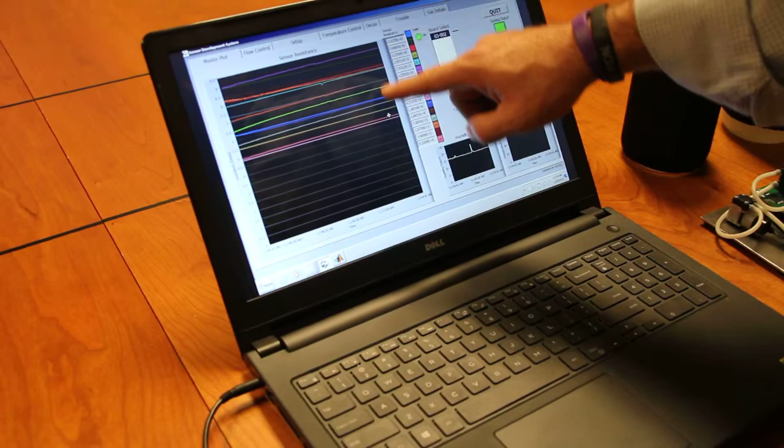We have the smart sensor sitting here on the sensor module, and what we've got here is a LabVIEW interface that'll show you the raw signal responses from our nanosensor array. And right here you see there are 16 nanosensors with 16 signals. We've got a temperature and a humidity sensor that are on board to the chip.

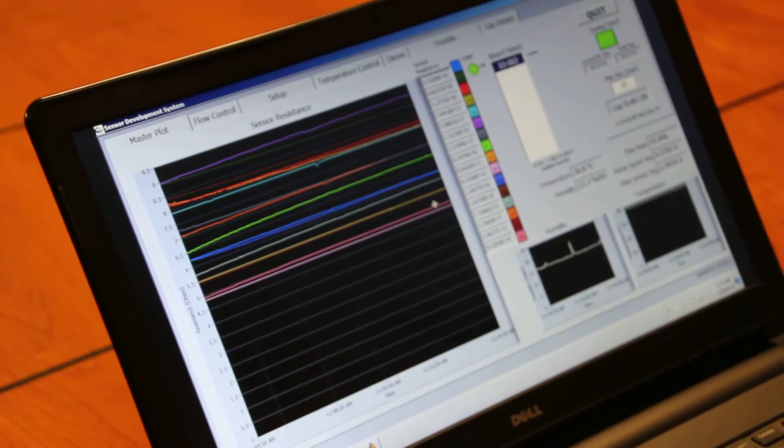So what I'm going to show here is a demonstration of the smart sensor system detecting toxic industrial chemicals and showing the strength of this approach, where we have negation sensors that will help proactively look for and negate possible interferent conditions such as relative humidity.

And every technology has its own vulnerabilities, and we'll show you how we've addressed it in ours. And in reality, other technologies either haven't addressed it or they couldn't address it because the interferent masks their signal's ability to pick up the actual threat gas.

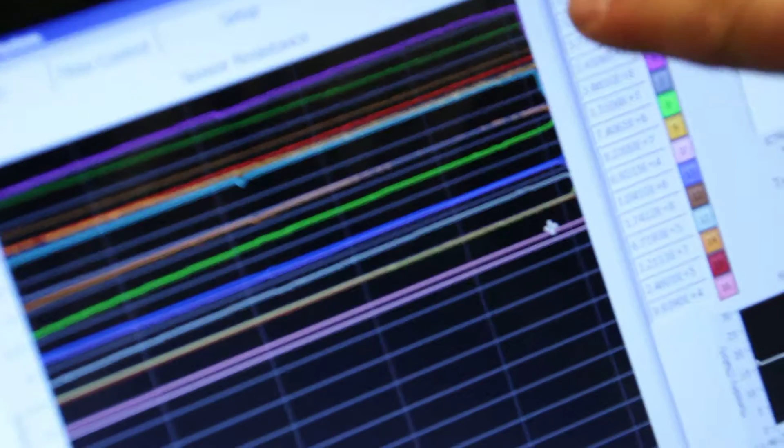So what I have here is ammonia gas. I'm simply going to open up the supply, put the sampling tube into it. You're going to immediately see responses from the nanosensor arrays. These are instantaneous responses. These sensors all feed into a suite of algorithms.

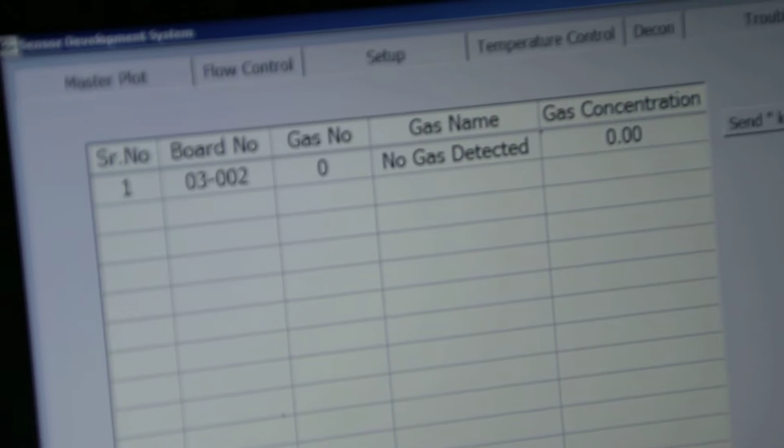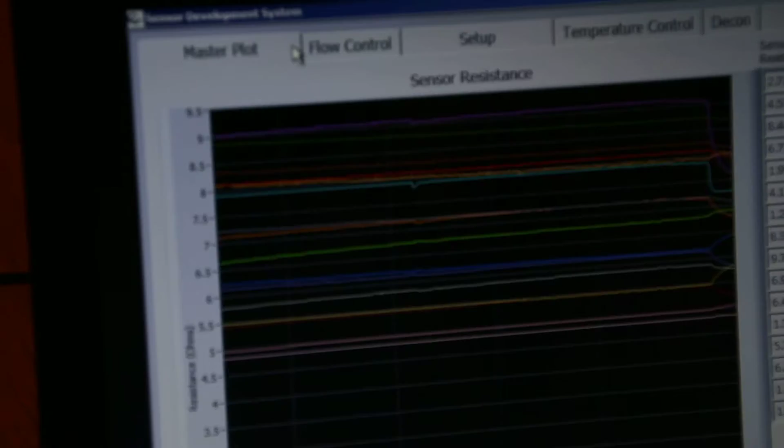And if we go to the output of the algorithm, before we did the hit, there is no gas detected. It takes up to at least 12 seconds to identify what gas. We detect ammonia at 3.5 parts per million. If I go back to the raw signal, you can see that they are actually responding.

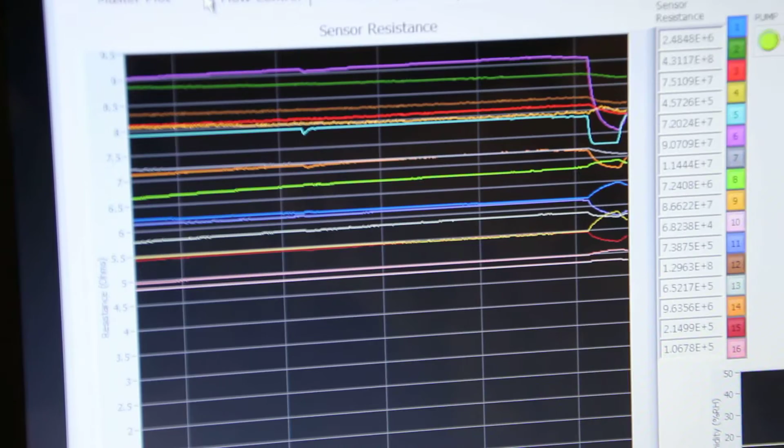I will disconnect. So I'm now removing the ammonia, and you will see that the raw sensors will immediately recover. It's a reversible behavior, and these sensors will last for multiple years, typically 4 to 6 years.

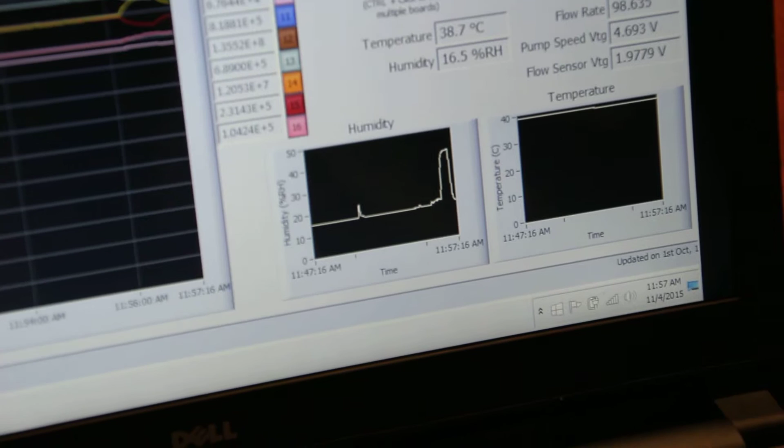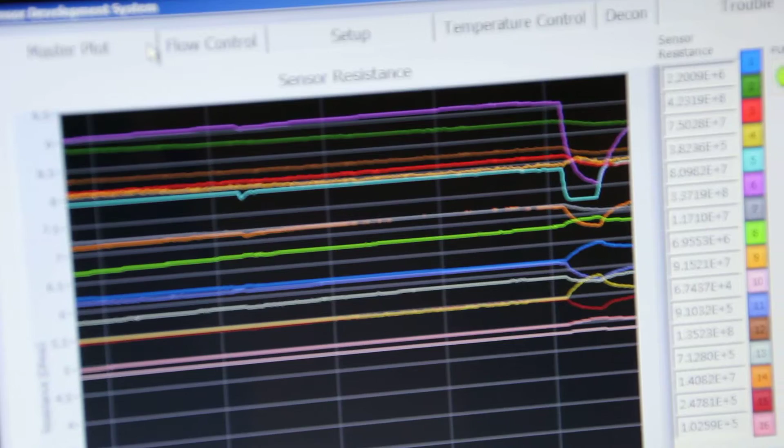If we look at the humidity sensor, we actually can see that while we were exposing it to 3.5 parts per million of ammonia, we were actually also experiencing a simultaneous change in relative humidity of over 25,000 parts per million, or about 25% RH. This is simultaneous, and we were still able to detect the actual trace level threat in that simultaneous RH change.

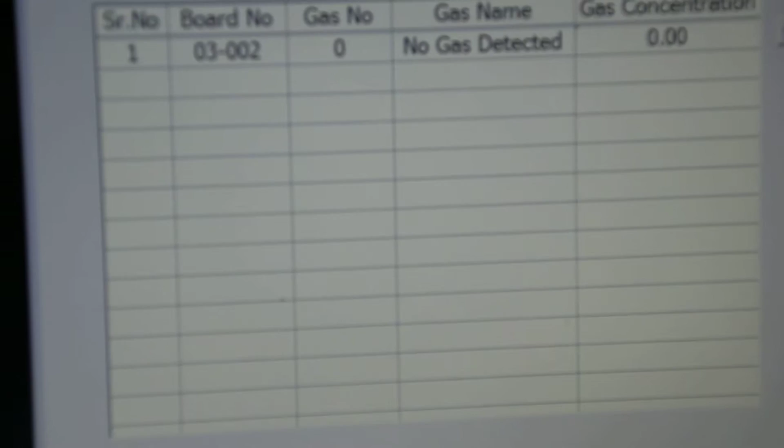This is significant. Most technologies cannot do this. Even if they had an onboard temperature humidity sensor, the RH change would have masked their signal response to the threat. So if I go back to the gas details, we have recovered. So now the device says there's no more threat, and it is ready to test another condition.

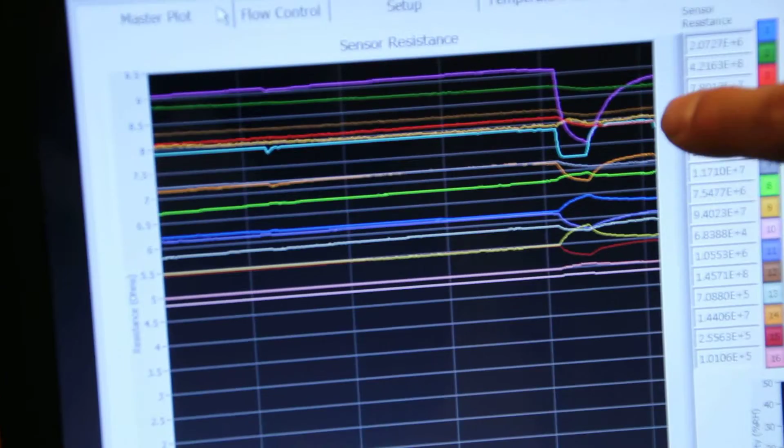If we take RH, so this is simply water in a bottle, and we disconnect and sample through our sensor array, we'll see some instantaneous responses to the moisture change. We'll see that also as evidenced on the humidity sensor.

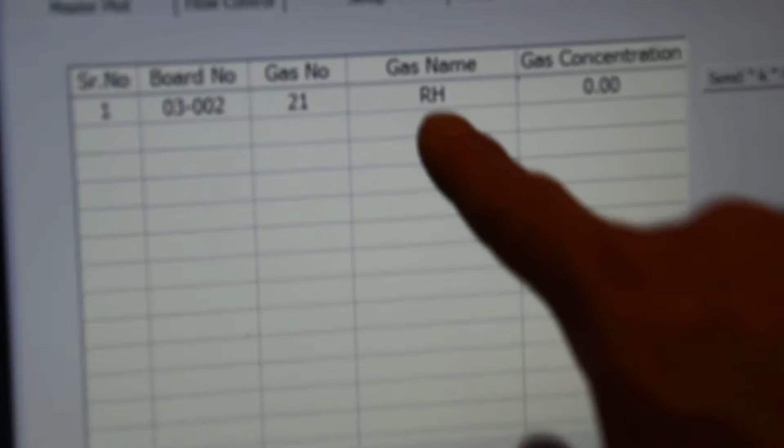But the key here with the negation sensors is we could say, okay, we don't detect the threat, but our technology's uniqueness is we will proactively identify non-threat conditions, as in this case relative humidity, to tell the algorithm we've identified something, it's not a threat, so we've negated that possible false alarm.

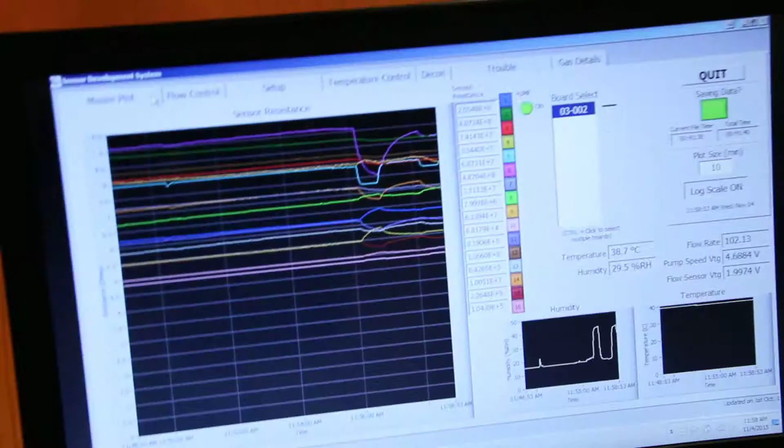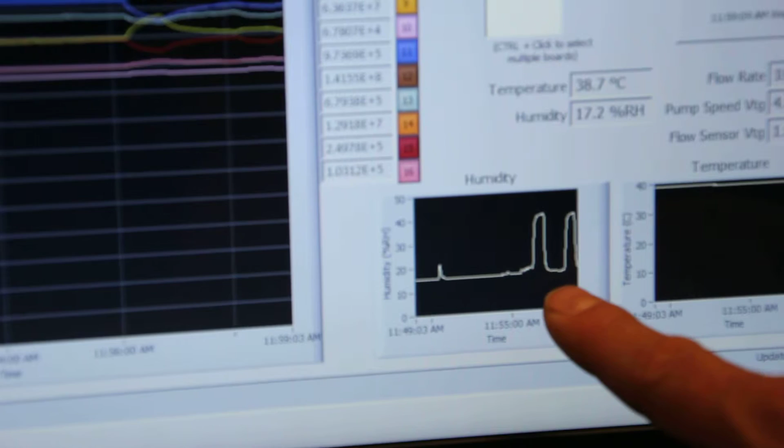I disconnect, and at this stage you can see that the nanosensor array is in full recovery mode, the humidity sensor is in full recovery mode, and what's critical about the humidity sensor's responses to both the ammonia plus RH change and then the RH change only is they're actually identical from an RH sensor standpoint.

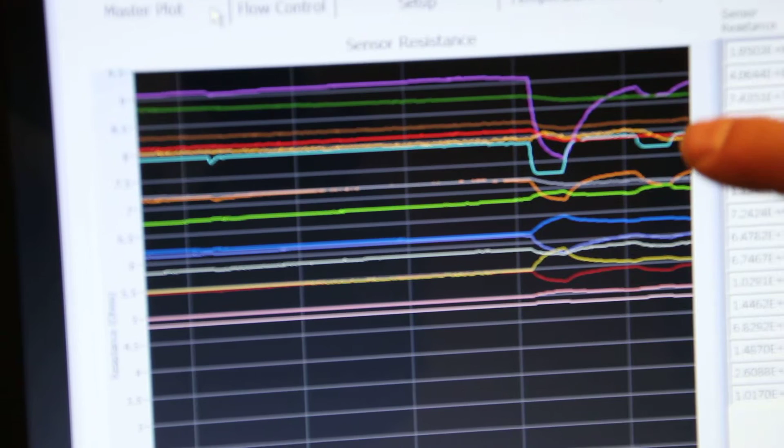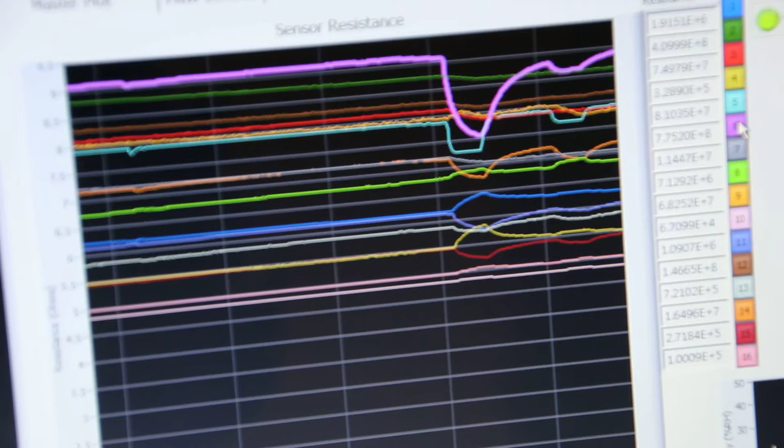But the nanosensors are absolutely not identical. You have some sensors that will respond to the ammonia, but they don't respond to RH. That would be evidenced by, for example, sensor 1. And then also if you look here at sensor 4. And then if you even look at sensor 6, the ammonia response was quite large. The RH response only was quite small.

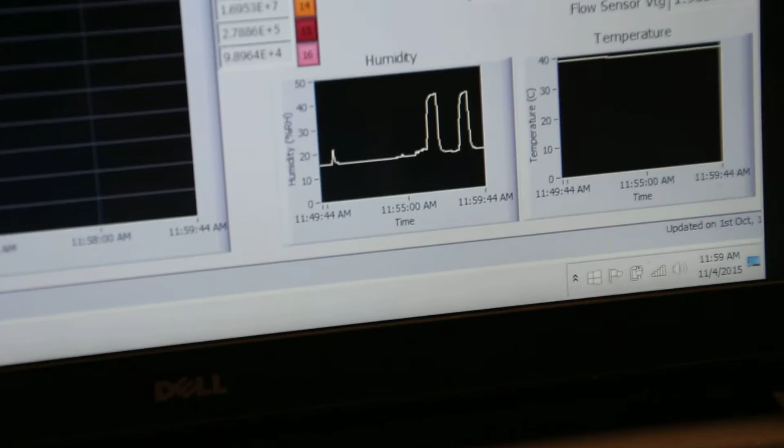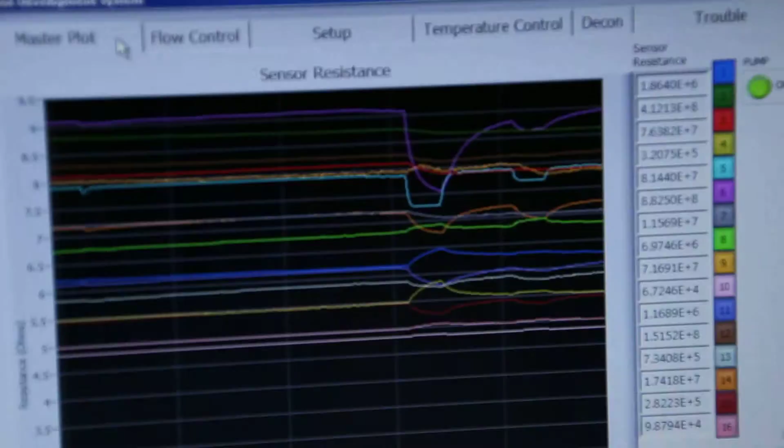And again, the ammonia response was to about 3.5 parts per million. The RH change was about 25,000 parts per million. So now if I go back to the algorithm output, we're back to no gas detected. If I go back to the raw signal data, you'll be able to watch. I'll expose this to chlorine gas. Again, I'll take the sample inlet, connect it to our chlorine source.

If we look, we get immediate nanosensor array responses, and these are growing. So these rates of responses are what information is fed into the algorithms. Again, we see an immediate RH change simultaneous to that. It's a very difficult condition. And we go to the algorithm and we detect chlorine within seconds.

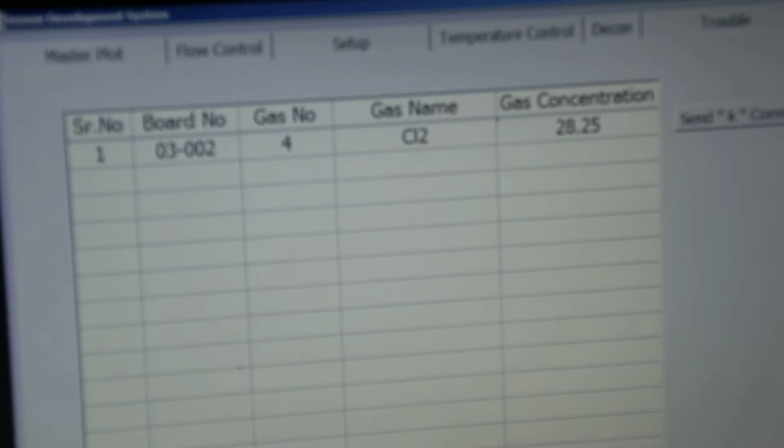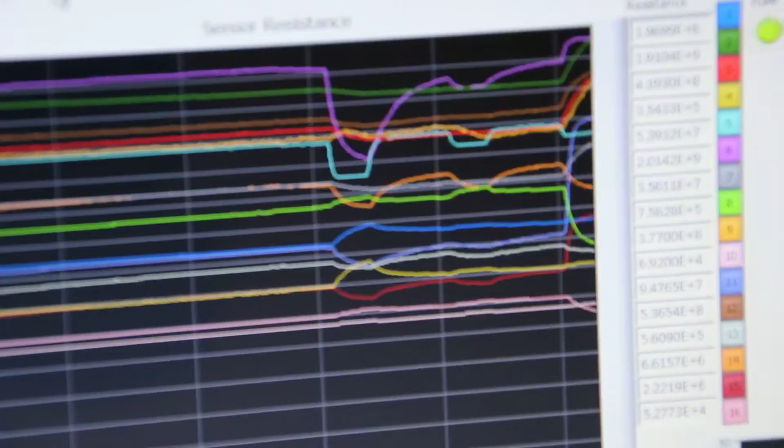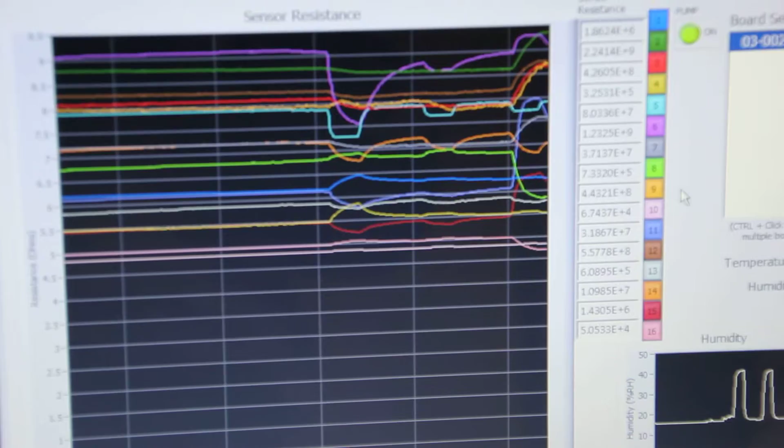And if we go back to the chlorine responses, they're still responding. If I remove them, they will start to recover. So I have now disconnected. This is the sample inlet. We are now in recovery mode. And as evidenced, if you look at sensor 5, it's immediately recovering. And if you look at the RH responses for all three conditions, they look identical.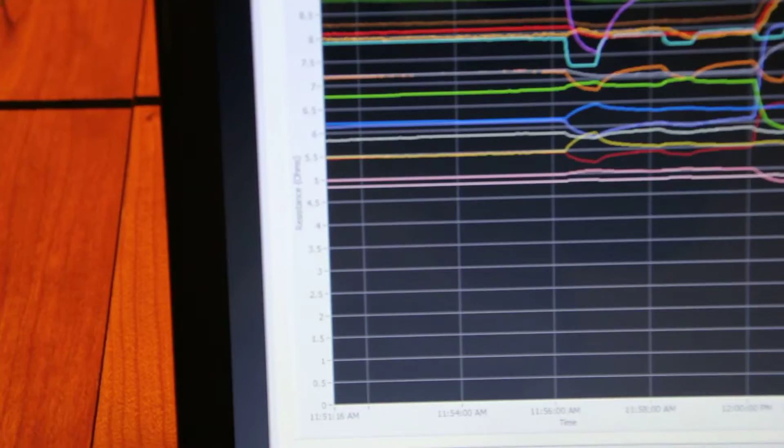And the essence of this is the smart sensor can detect chemical threats at trace levels, not only in the background of interference, but in simultaneous changing backgrounds with interference. And RH is a universal interferent to all technologies. And if we go back to the gas details, we are back to no gas detected. This is fully autonomous. It's continuous, real time.

Just to look, we sample gas in, it comes through our sensor, through a pressure or a flow sensor, through our pump, and exhausts out this way. This is a fully autonomous system with no user intervention required, and we simply have an on-off power switch, and there is no calibration required for detection or identification, and only periodic calibration is suggested depending on the level of quantitative accuracy that's required by the user.

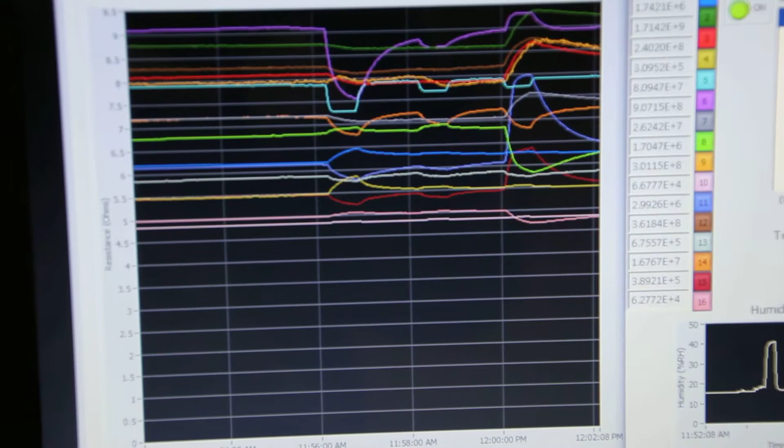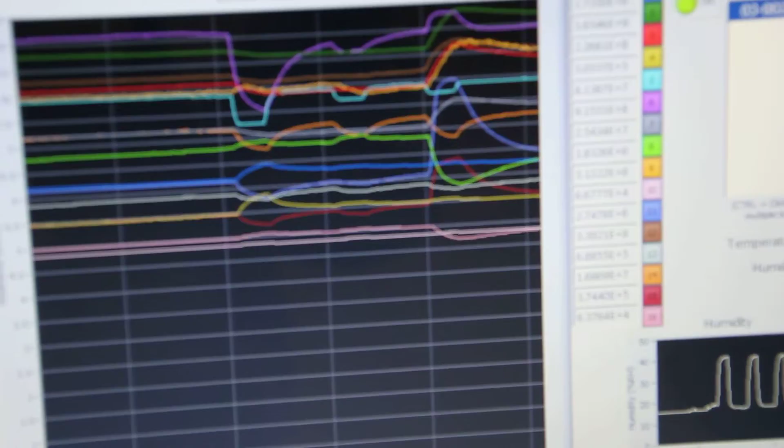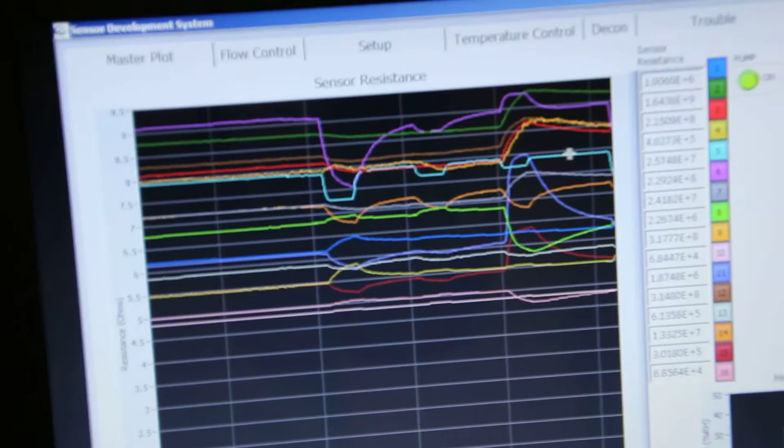And so now you can see we go to our algorithms. We are good to go here. I will just show you again ammonia. If we expose the device, the smart sensor, back to ammonia, we are now sampling ammonia. We see instantaneous responses again. We also see instantaneous humidity response with the humidity sensor.

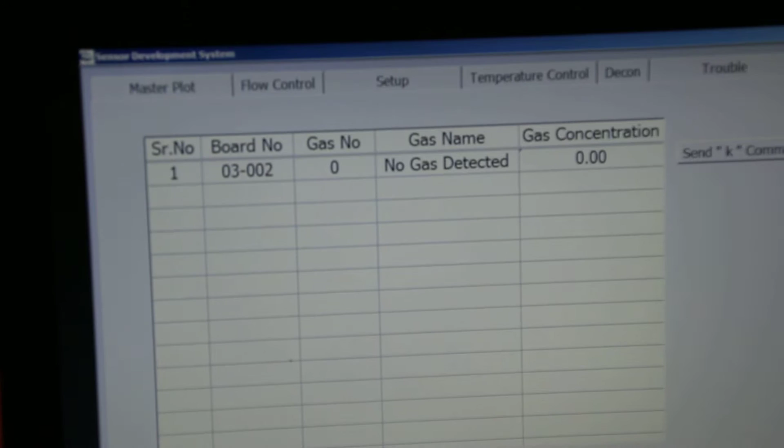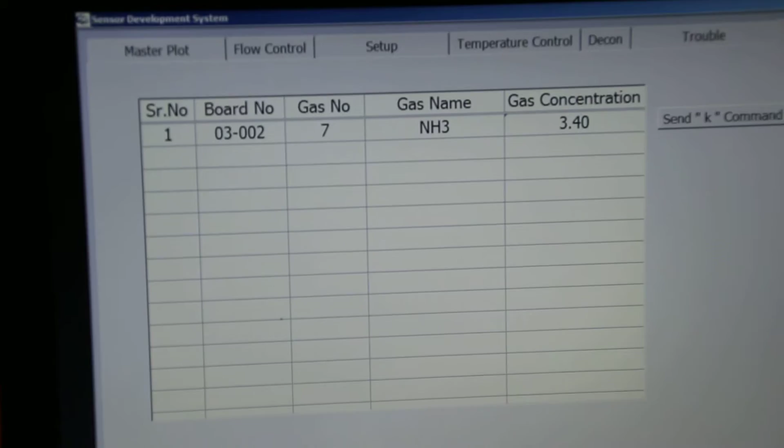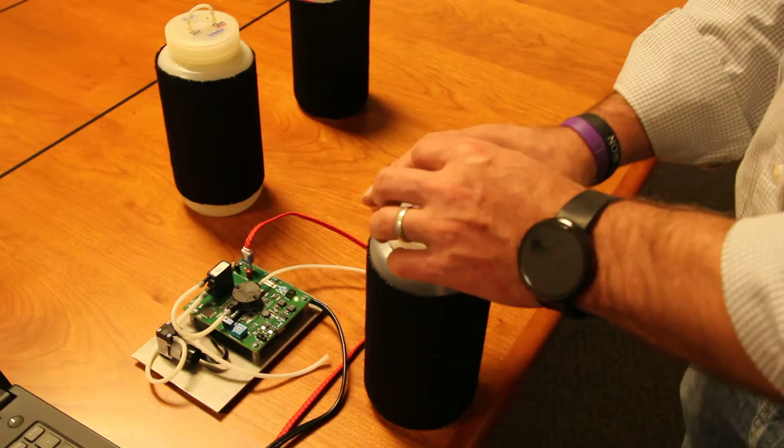And if we go to the algorithm and we await the assessment, the algorithm is taking in this raw data and tells us that we in fact have ammonia. It's important to note that the concentration is slightly less this time, and that actually makes sense because this bottle builds up headspace to build up concentration, and we had just sampled from it before, so it was building back up that headspace. We disconnect.

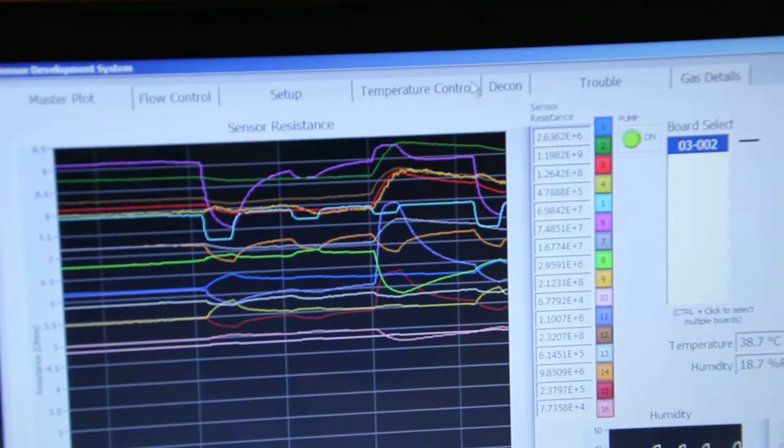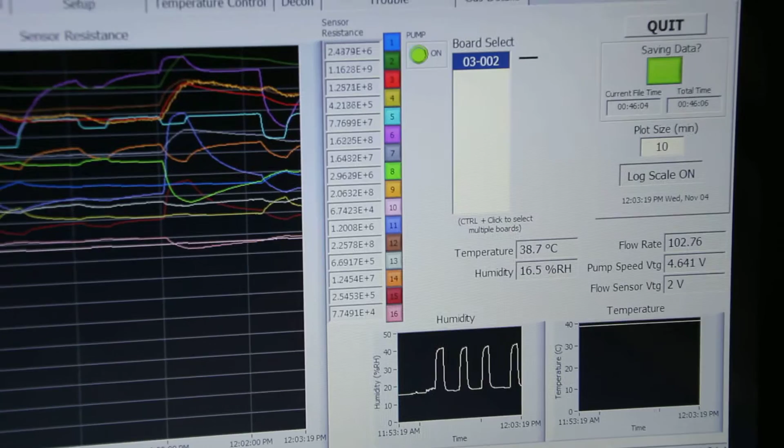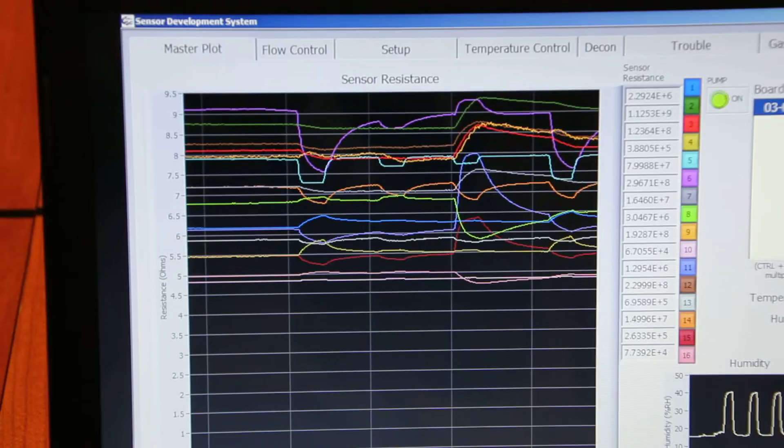We are back to recovery, and the recoveries are quite rapid, and the humidity is recovering as well. And it's also important to note that the humidity sensor does not respond to the chemical threats. It's a very selective and specific humidity sensor, and coupled with our nanosensor, provides all the information you need, not only to identify the threat, but to identify it in the presence of and against humidity changes. If we go back, we have no gas detected.